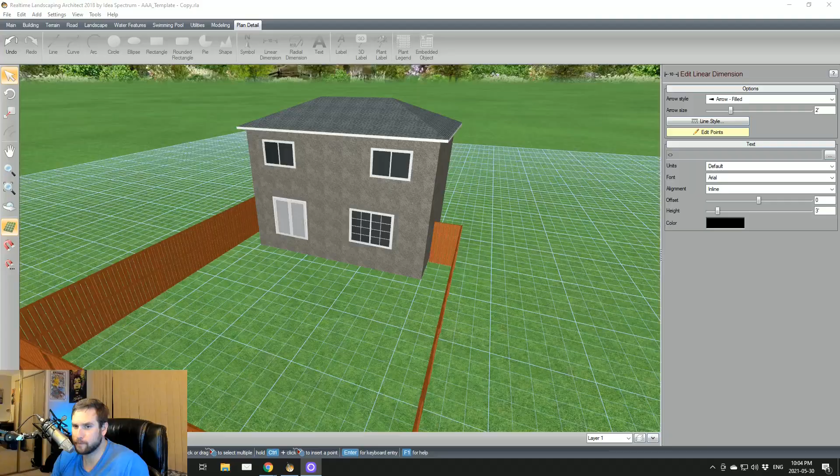So what I'm going to do is just quickly share my screen here. And as you can see, I have actually like a mock house ready to go. So this is going to be our model for today. But I actually have something to show everyone before we get started here. So this right here is the Wood Decks Handbook. You can download this at the City of Winnipeg website. I'll show you how to get to it at the end of the video. This is basically what you need to download before you start any project.

You can also go to our website, and on our website there is a tab under deck tips that is how to do a deck permit. So there's a really good guide there. But the best place to start is to follow this guide. This is a lot of in-depth information on exactly what you need to do to build a deck and some building practices, and also what kind of deck you can build and what kind of zoning requirements you have to abide by to build a deck.

So just to get started, the first rule that comes up when I scroll down, so it's obviously got the table of contents. So right here, the first thing in general information, it says here, do I require a permit to build a deck? And it says yes. A building permit is required for any deck which is higher than 600 millimeters, 24 inches above ground level, or any deck that's going to eventually support an enclosed structure.

So what that means pretty much is in the City of Winnipeg, and it does differ depending on which area you are in Manitoba. Some municipalities are different, although most of them follow this guide to some extent. A lot of municipalities will actually have reused the deck handbook for their own guide, but just don't assume that these are your rules. This only applies to the City of Winnipeg, not to municipalities around Winnipeg or even right outside the perimeter. So always make sure to check your municipality. So anyways, it says here that any deck over 24 inches requires a permit, and also even decks that are going to support an enclosed structure in the future.

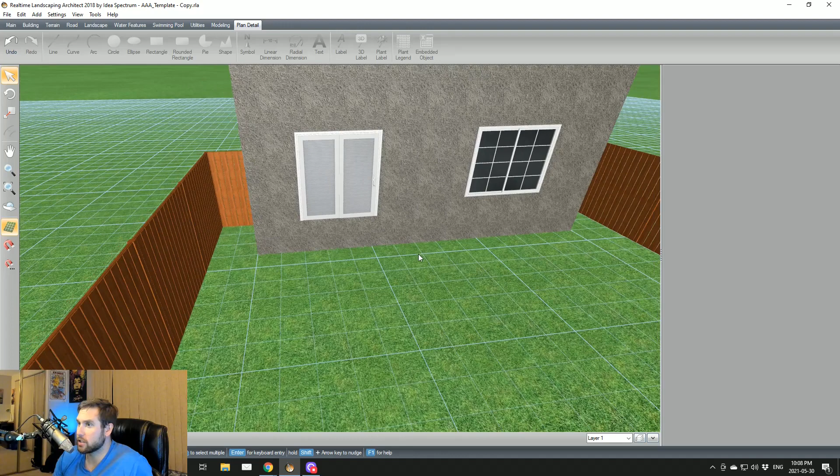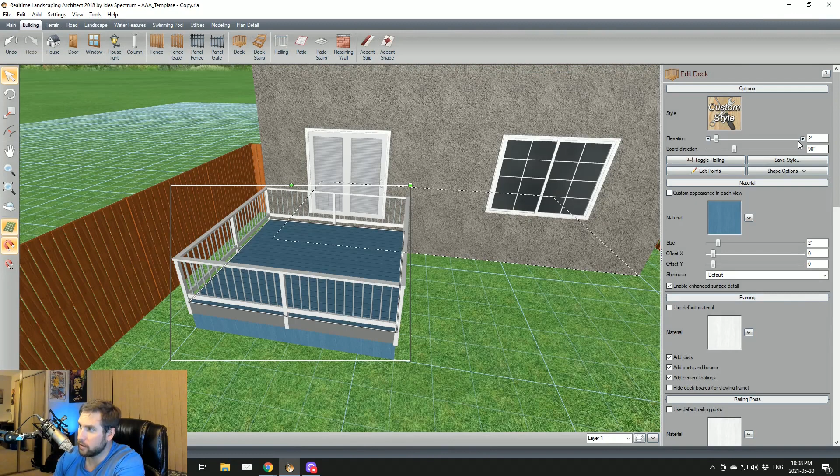So if I go to my model here, I already have my door height set to the proper height. So here we're at 3 feet. Say for example we have a door that's 3 feet high. If you want to have, let's say, a landing or a small 12 by 12 walkout deck here, like so. I'm going to just quickly switch these colors up. Bear with me. There we go. So if you're going to want a deck such as this, now this deck will require a permit, okay?

Now there's one exception to the 24-inch rule. So this deck is, let's see, we're looking at 144 square feet, it's 12 by 12, and it is 3 feet high. So a deck like this will require a permit. Now the only caveat to that rule is you are allowed a landing outside of your door that is under 36 square feet.

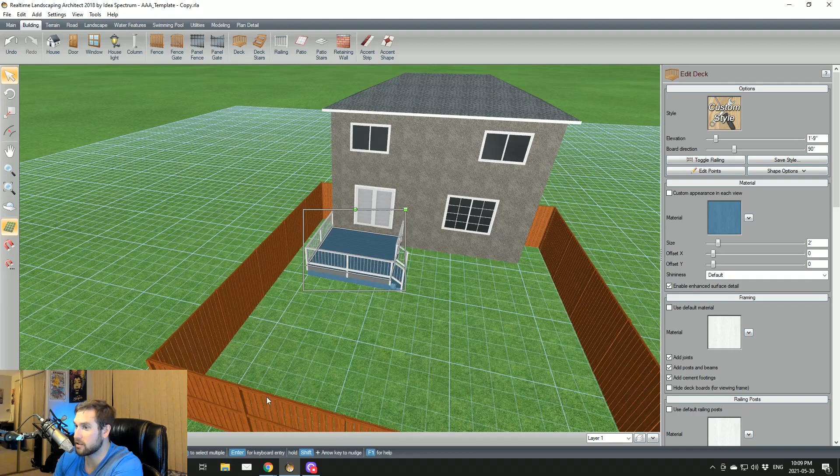So let's say, for example, you did not want to get a permit for personal reasons or maybe because of your setback. I'll get to setback soon, about requirements for your zoning, so that'll come in a minute. The only way you can get around this rule is if you build a small landing, and this is going to be an ugly landing. This is just for demonstration purposes only. So here we go. Say you wanted to build a small landing like this.

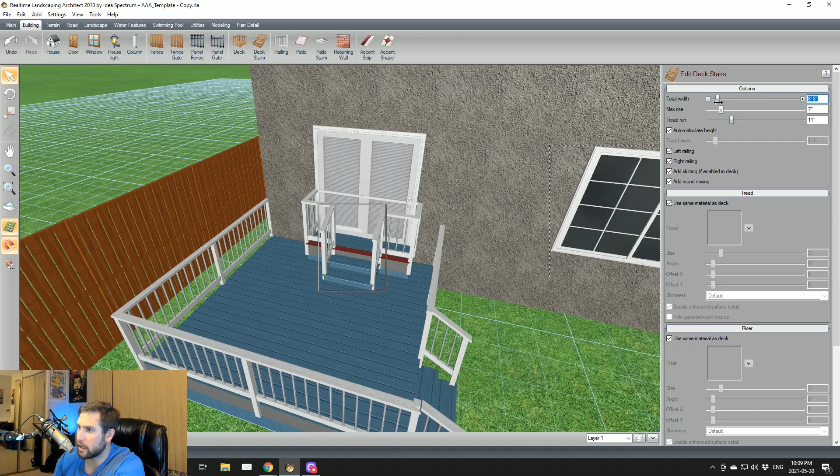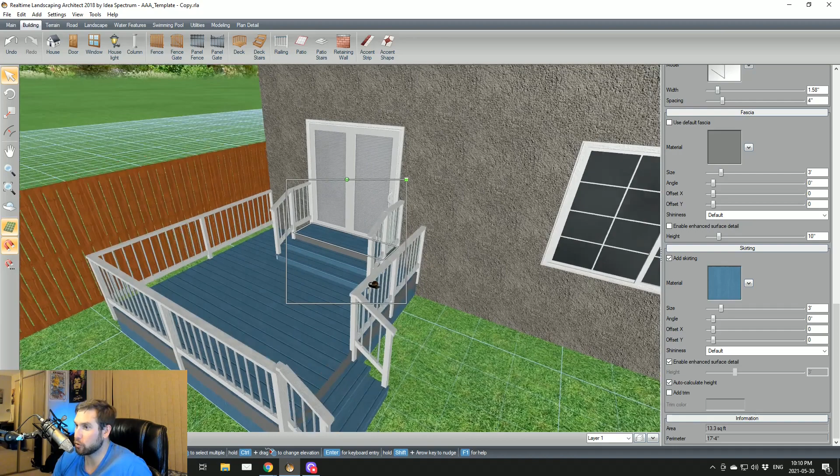And I would make this nicer in real life, of course, but right now, this is what you guys get, because I don't want to drag out this video. But anyway, so a landing like this, under 36 square feet, 13.3 square feet, something like this does not require a permit. So you are allowed a landing, so that's the only kind of exception to the rule. And then this deck, now that we've brought it under 2 feet, does not require a permit.

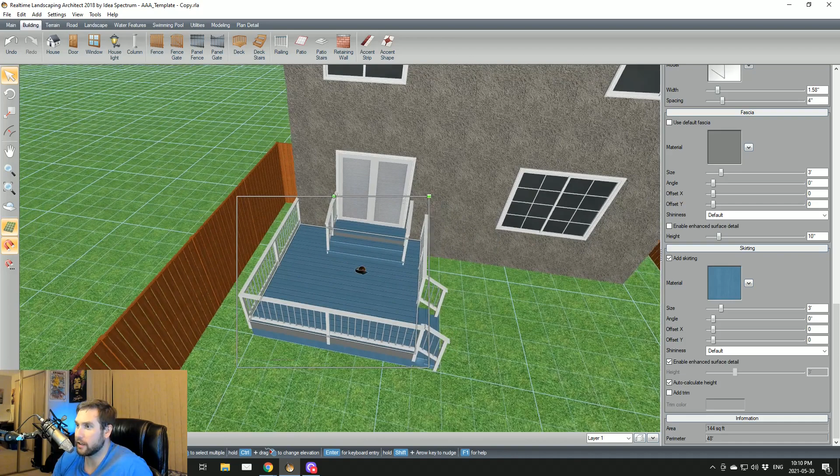And so what that means, when you don't need a permit, it means you can build it slightly differently. I still recommend to always abide by National Building Code, but you're not going to need an inspection. You're not going to have to follow zoning guidelines. So we're going to get on that next. And pretty much you can build it however you want, and you don't need to apply for the permit.

So the permit usually costs about $170, I think, right now, with the city. I mean, the $170 is an expense, but the application is the far more difficult portion of it. Applying for it, getting it approved. A lot of people have a lot of headaches getting their information approved.

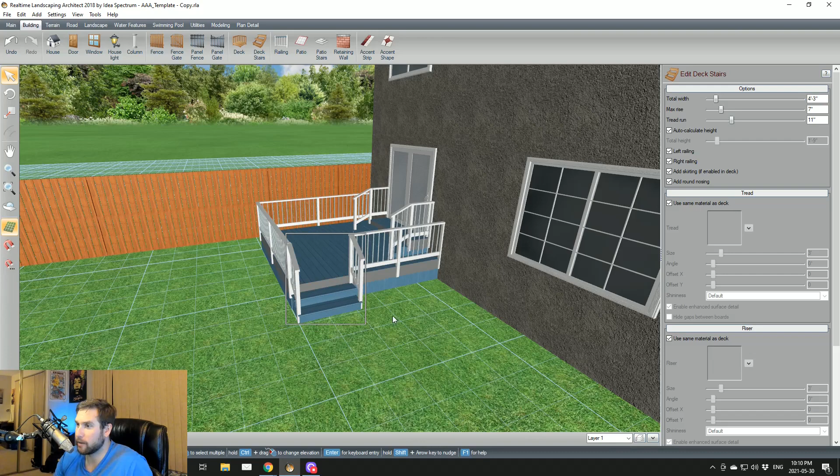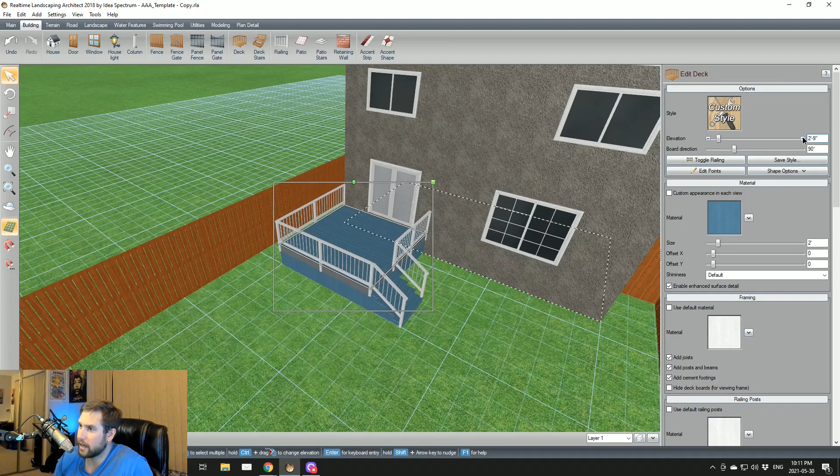I'm going to show you a mock template of a permit that's been somewhat completed, but in another video. But for now, we're going to just focus on the zoning requirements. So anyway, something like this would not need a permit. Now, I'm going to just switch this up a bit. We're going to get out of here and go back to our original deck. So that is how that works. Now we're going to look at the zoning.

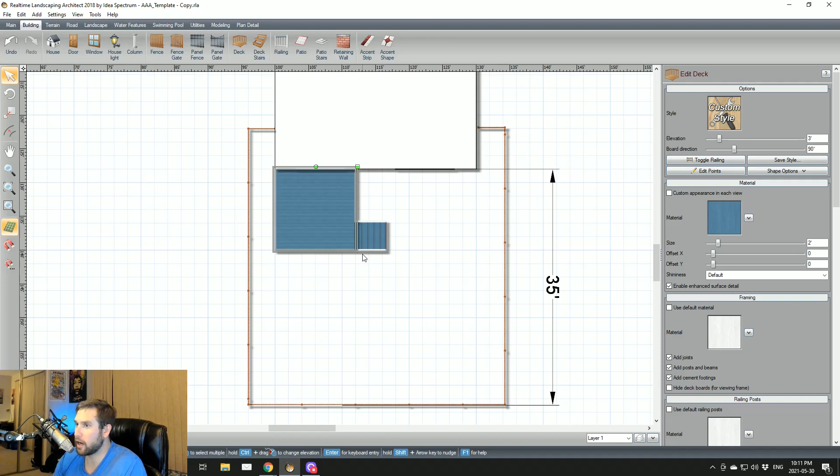And so zoning, there are a lot of exceptions to the rule, even in the City of Winnipeg, but as a standard, which you can use for now, and don't hold me to this, because you have to check your own property plot lines with the city or with the survey, the rule of thumb is generally this. Zoning is pretty much the distances you are allowed to build to on your property.

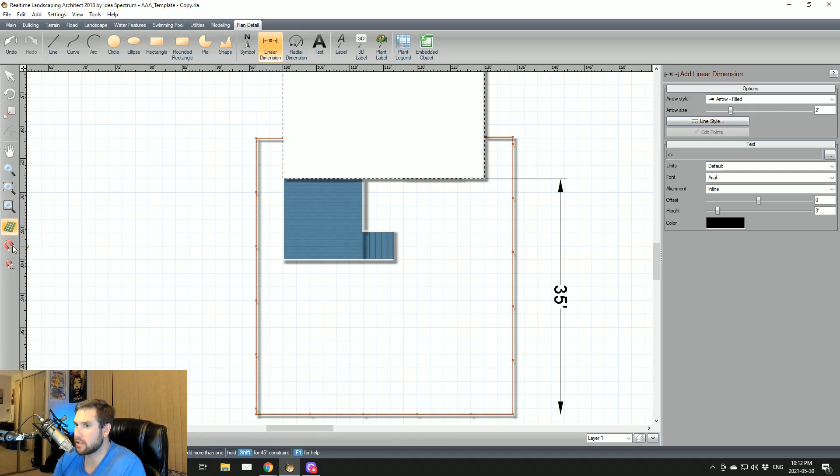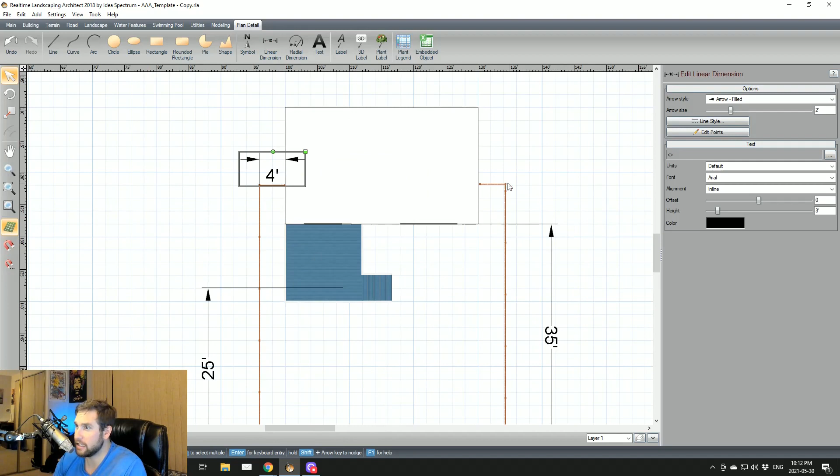Okay, so a deck over 2 feet has to abide by certain rules. What the city wants is a deck over 2 feet to be 25 feet from the back property line. So this deck would be infringing. From the back property line, this is the fence. And they want generally, and there are exceptions to this, 4 feet on each side of the house. So if you're planning a deck that's over 2 feet in height, you have to abide by these rules. Okay, there are ways to get around them.

So you can apply for a zoning variance, I'm going to do another video on that as well, but a zoning variance is basically an application to request amendments to the bylaws from the city, and it's a pretty long process, about 6 to 8 weeks of processing time, and you have to get some approval by your neighbors. But if you need to bend these rules a little bit, that's one way to do it.

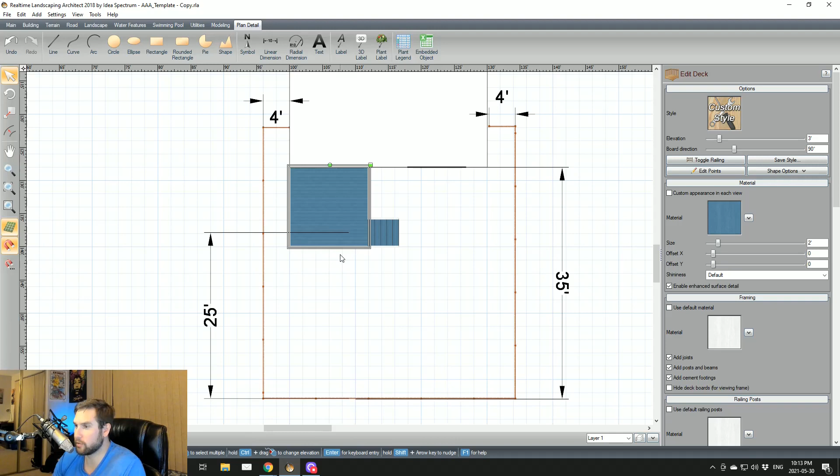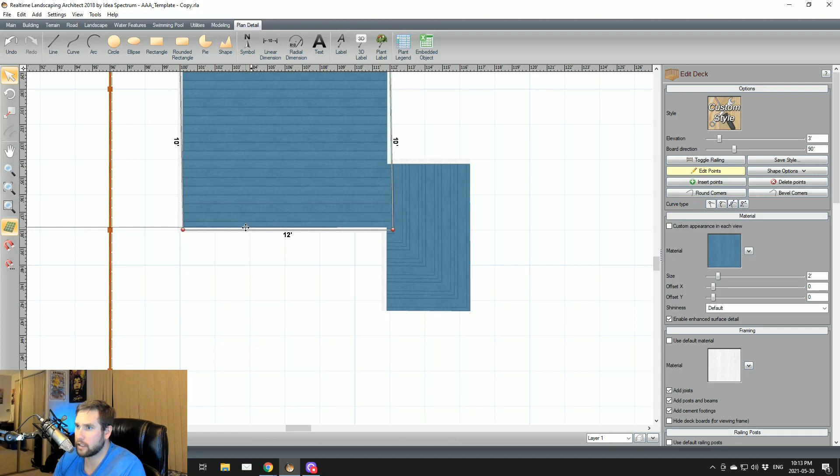So for right now, just for an example, we're going to try and comply with this set of rules, because say we want to build a 2-tier deck. If I was doing this design, I would suggest to the clients, let's see, we're going to move this back, to right around 10 feet. Now we're going a little crazy here. Why are we doing that? Okay, good. Right around 10 feet here.

And we'll do a second level. Let's say they were doing a 2-tier. And let's see, 16 foot. This is a little big. Move that in. Pull this like this. No, we're going to go back. This is a little too far out. There we go. Make it look nice. Just switch some stuff up here. There we go.

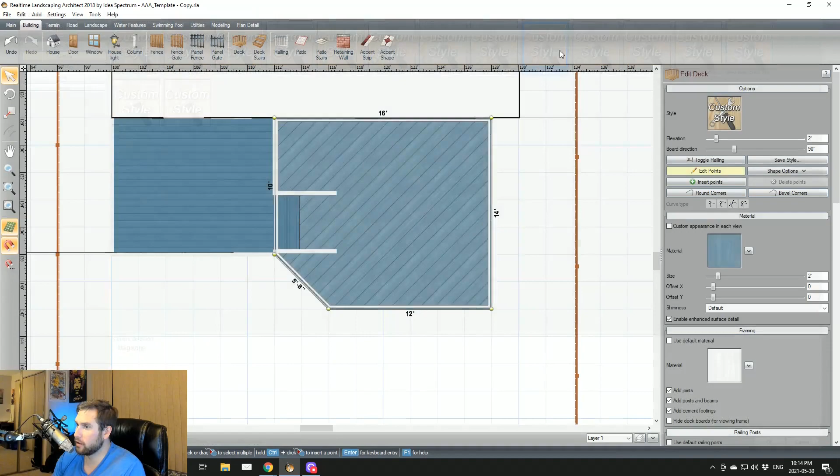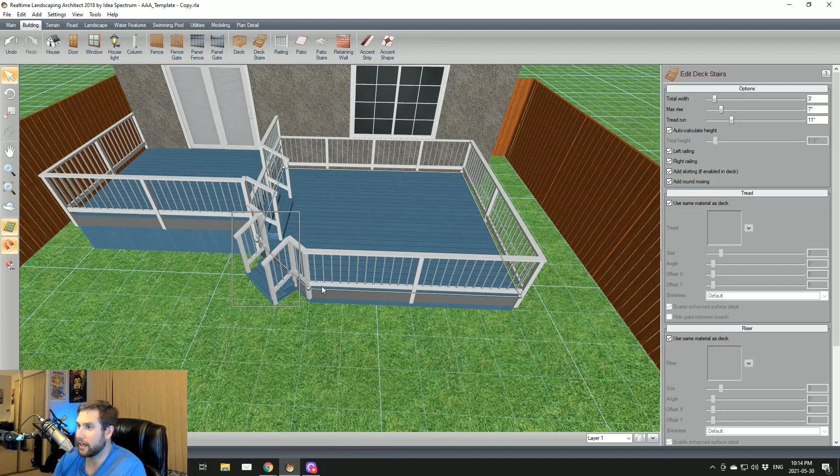So why I'm doing this is to explain to you exactly what would happen here. So in this case, if I was doing it, this upper level would actually be, since it's the only level over 2 feet, the only level you'd have to apply for a permit with. So this lower level doesn't count as a permittable deck platform.

So that's something to consider, and always make sure that you understand what you're doing there, because you may not know this, but when you do apply for a permit and it's approved, the city actually recognizes this deck surface as part of your home. So actually I believe your property taxes will go up because the square footage of your residence has gone up.

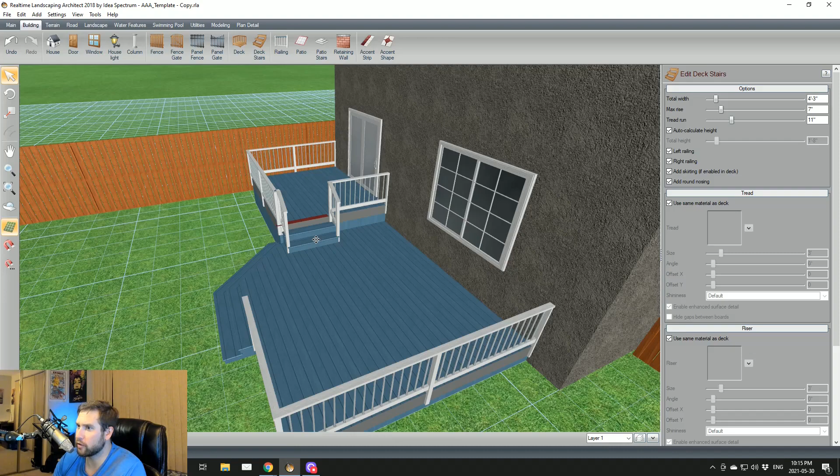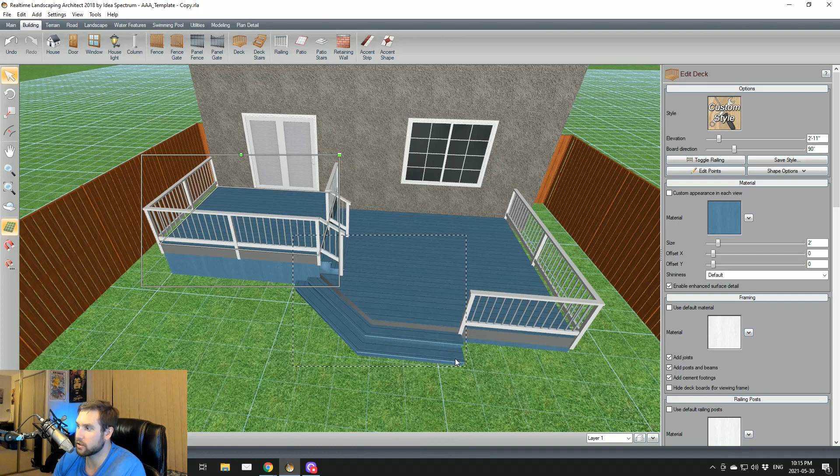And let's say you submitted this deck as well, and this deck is actually 1'3", but say you did and it just slipped through the cracks, you'd actually be paying property taxes on another 216 square feet that you shouldn't have paid on. So make sure to always understand that as of today, 2021, June tomorrow, it's only the level that's over 2 feet.

Now, if the whole thing was over 2 feet, obviously that'd be a totally different story. But right now, I'm just doing this for example purposes, and only this level is over 2 feet. So that's pretty much the rule of thumb here. So we're going to start with that in this video, just to keep it nice and short.

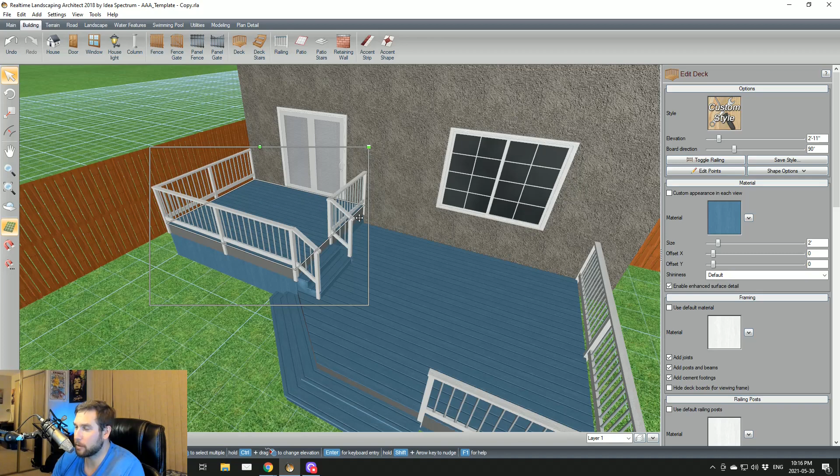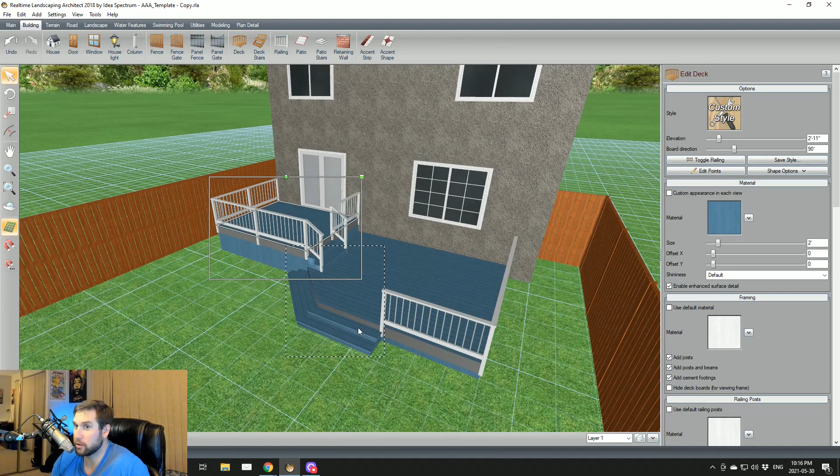I'm going to go into quickly right now what can happen if you don't get the permit. There are a few things, and it depends on what you're infringing on. That's really the thing you have to consider, mostly. So if you don't get a permit and you're in compliance with all of the zoning bylaws, say you're 4 feet away from the side yards and 25 feet away from the backyard, like here, you don't get your permit and you do get busted.

What will happen generally is you're going to pay a fine, probably around $200 to $300, and then they'll just make you get the permit. The only thing that would suck about that is if you built it improperly and they made you bring it up to code, because when you do the permit process, they inspect the way you're building it. You submit forms on how you're going to build the deck, and they approve that to make sure you're doing it correctly. So if you didn't do it the way they want, you could get burned a little bit. So something to consider there.

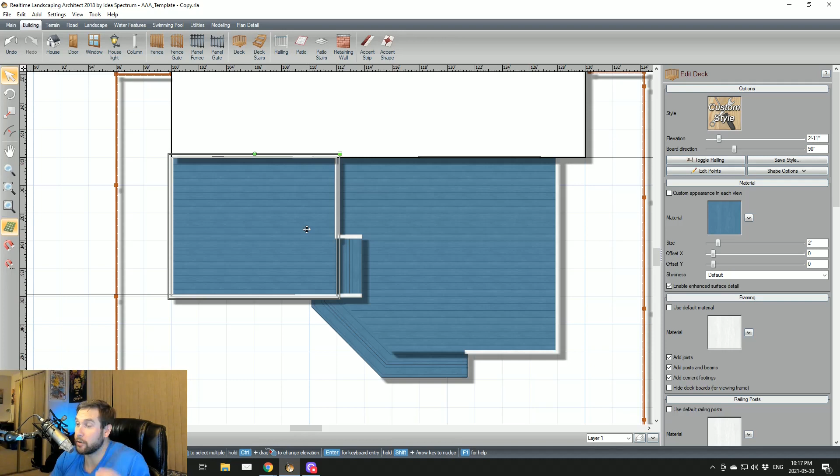That's why we always insist on doing the permits. It's just much easier. I mean, to be totally honest, it's a massive headache. It's just the way it is, though. It's much better if you just do it, because there's nothing worse than having the city or a municipality on your back bugging you about bringing something up to code, because it's way harder after the fact. So just get the permit and bite the bullet. It's way better to just do it right the first time and take the time to do it.

Now, let's say, for example, you built it improperly, and I get so many calls on this every single year. It is outrageous, about people who had a contractor who built their deck in violation of this 25-foot rule, and now the deck is built. They didn't get a permit. Maybe they lied or they just didn't know, and now they have this deck infringing.

So the only way they can kind of fix this is if the city catches you, and in new developments especially, the city does check and they do come around. So if you're in a new development specifically, like in a suburb in Winnipeg, bear in mind the city inspectors do come around and they will check your backyard. So don't think you can get away with it. There's a good chance you won't.

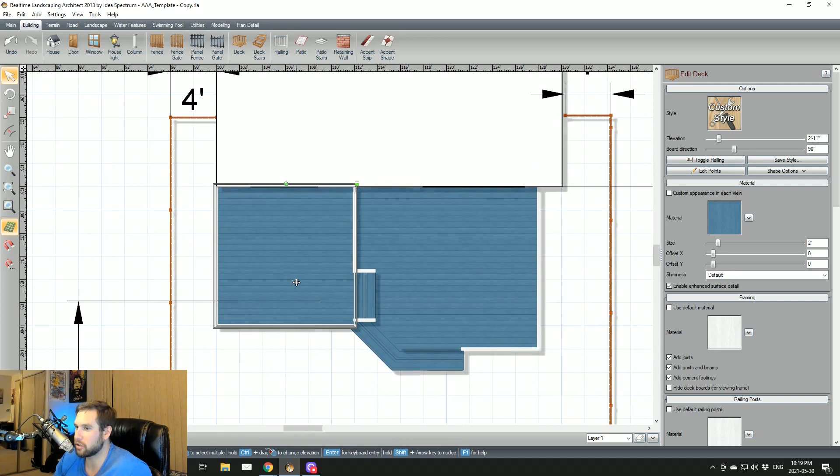So this deck, what they'd make you do is, depending on how deep it is in the yard, they're going to make you get a zoning variance and then make you bring it up to code and then take out the permit. Or they could actually just make you take it down. It would be an epic disaster, and that'll just be a huge, massive headache. So it's always good to go through the proper zoning and permitting processes to get this all figured out beforehand,

because in construction, I'm going to tell you right now, taking this stuff all apart, especially wood decks, even maintenance-free decks, it's a massive headache. Decks do not come apart well, and when people ask me to come and repair decks, it's a nightmare, because when you pull stuff apart, it gets broken, it's all warped together, and it's just no longer what it was when it was brand new. The boards aren't as straight as they used to be, and so we just don't like doing it. So it's always best in construction to do it right the first time. I cannot stress that enough.

I'm going to conclude this video with a few resources, and then I'm going to go into depth in a few more videos about more practices that could help people applying for their permits. We do apply for all the permits for all of our projects. I'm just doing this video for people who are in the exploration phase of buying a deck, so it'll help them make a better informed decision.

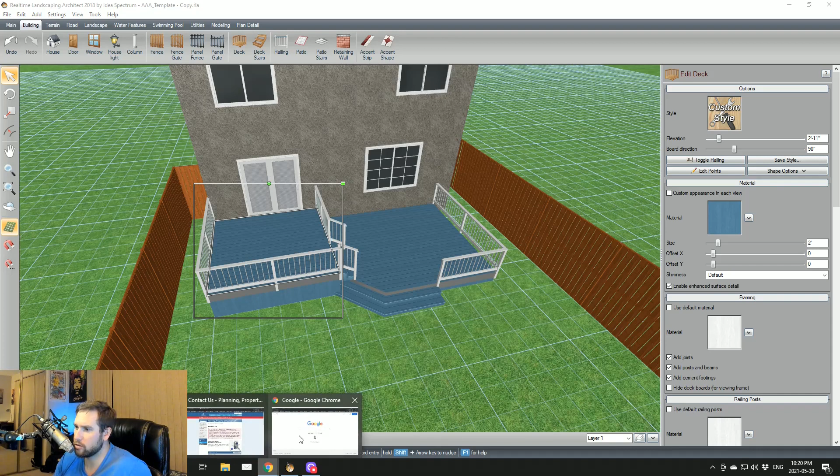So we're going to go to some websites here. We're going to go to our website. All right, so this is us. The first thing to consider is right here under deck tips. This is obviously the desktop version, so there's going to be a little three-lined bar in the mobile version. You just click on that and then go to deck tips again. And so we're going to hit deck permit.

Okay, so I wrote this guide I think about 4 years ago. This is a pretty in-depth guide of exactly what you can expect for every single portion of applying for a permit. I even go into exactly where you can drop it off. Like I said, I'm going to do a more in-depth video of this, but for now, this is a really good resource if you're doing it yourself, and you can get the quick and easy way of figuring this out.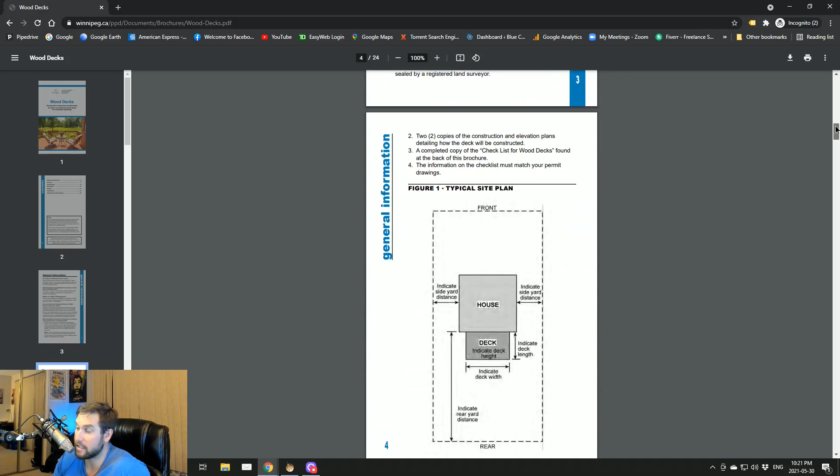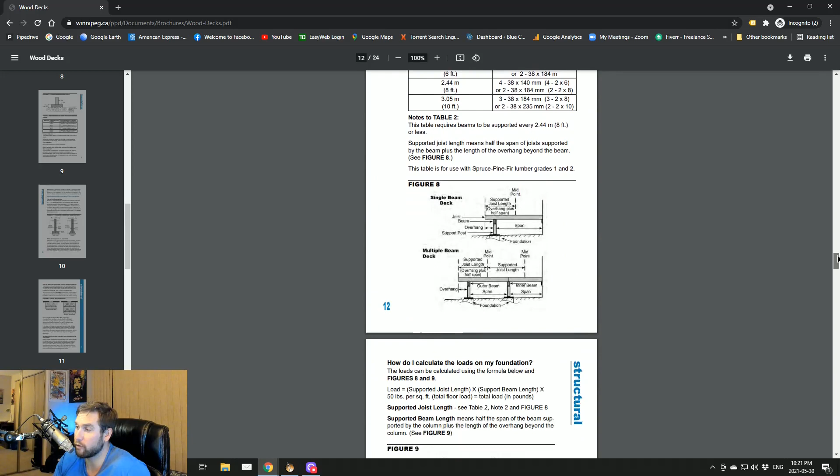For the deck handbook, you can actually access it through our website. Just at the bottom here, the resources page, you go to the Wood Deck Handbook PDF and click on the link, and it'll bring you right here. It has everything in this thing. It's a little confusing, but it's a really well written guide, and it explains what you can and cannot do very clearly. So make sure to take a look at it.

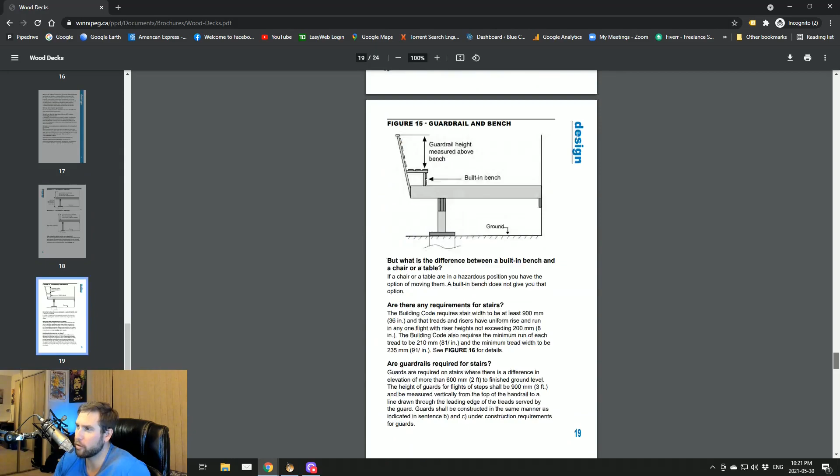A lot of people who don't know construction stuff, I understand they might have trouble with it, but that's why we're here, so we can help you. We basically take care of all this for you anyway. But if you're construction savvy, or you're looking to build your own deck, this might be something to study up on. Really studying it will help you understand how to do everything. So that takes care of zoning.

I'm going to be making a few more of these, and I think for the next video we're going to work on not just the zoning, but we'll go down here to the paperwork aspect of what you need and where you need to go to apply. So here's some of the paperwork, and we'll be doing that on the next video.